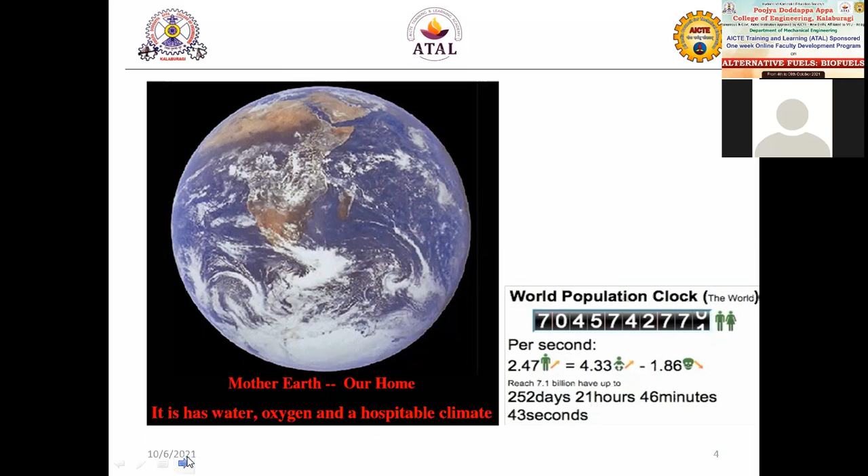So this is how we have our biosphere. We have large species consisting of plants, insects, unicellular organisms. We have advanced animals, mammals; all these diverse groups of organisms form this beautiful earth. And this particular point is to be noted by the human race, that earth is not the gift only for the human race, but we also have to support other forms of life. So we cannot just destroy the other forms of life to make ourselves comfortable. That would be going against nature, because whatever form of life we have has been created with a reason. So therefore, living in harmony with the different forms of life we have on earth is the basic principle of sustainability.

So with this particular backdrop of sustainability, I'd like to introduce the basic concept of Dashavatara, what we have been knowing since our childhood. So this basically depicts the various forms of life and how we respect the different forms of life by giving them the role of deities. We have the Matsya Avatara, we have the Kurma Avatara, we have the Avatara in form of the boar, we have Narsimha Avatara and different avatars that we study in our mythology. This basically highlights how we are in harmony with nature.

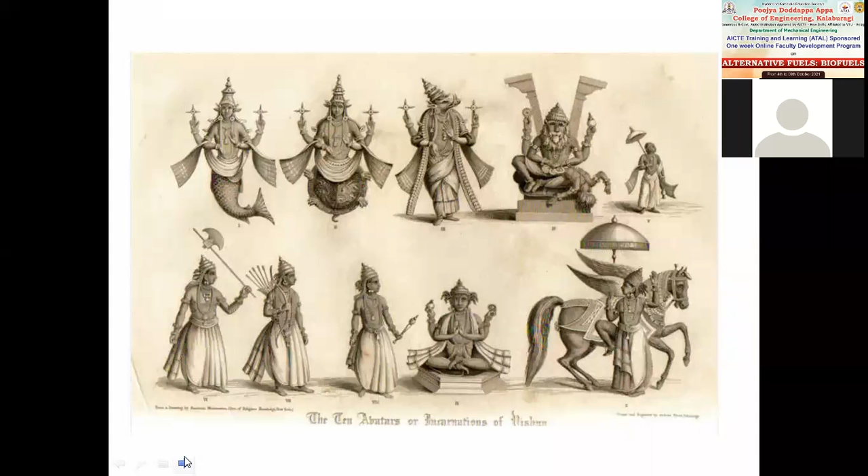And with this particular concept, I extend further: why do we require or how do we attain development? Energy is an important part of development. So as we can see, we require energy in different forms and we need it for our requirements. We need it for vehicles. We need it for running the industries. We need it for our recreation. So life without energy cannot be imagined. Therefore, energy has been an integral part of our day-to-day life. So now, the quest for energy has made human beings explore different resources.

For example, we try to generate electricity from nuclear fuels. We also generate electricity from coal. We also generate electricity from wind. So this way, ever since the inception of the human race on this earth, we have found that man has been exploring different ways to produce energy for his basic requirements. So that is how we see energy and development are interlocked, or they are closely connected.

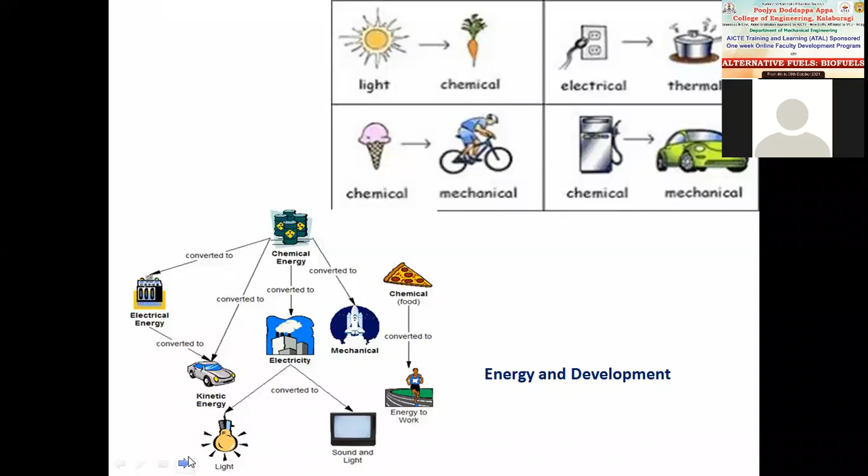And further, as I just highlight here from this particular slide, we use different forms of energies, and scientific development has been made in different areas to explore or to harness that form of a resource to generate electricity. So we study nuclear physics, where it was understood that by means of splitting the nuclei, we can have a large amount of energy generated. So that gave rise to what we call the nuclear fission reaction, nuclear fusion reaction.

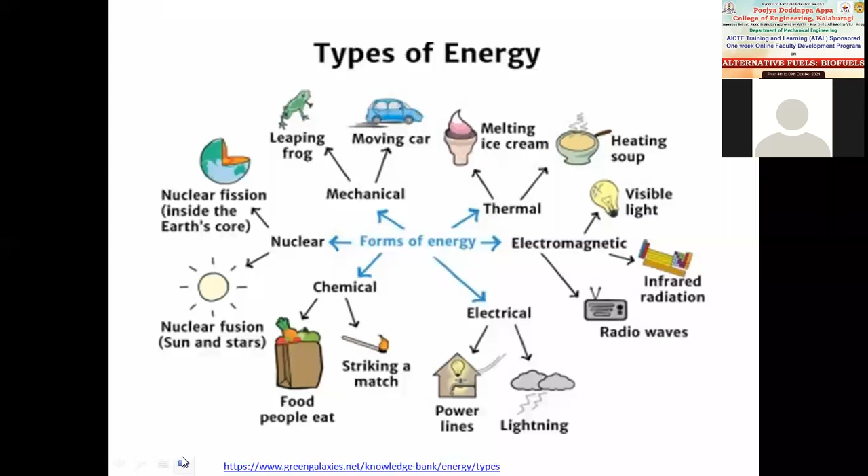So this way, man has always been curious to understand the intricacies of nature and then try to use these resources for his existence or for his benefit. So that is how this particular slide explains the different forms of energies and how they can be explored to meet our energy needs. And as we see here, nature has bestowed upon us various forms of energies. The energy in lightning is of such a large magnitude, but it happens in such a small instant of time that man has not been able to tap this form of energy.

Similarly, scientific advancements have made it possible for us to generate electricity and then use it for illumination purposes. And similarly, the other part of the slide shows you the heat energy that we use for cooking applications. And we have also explored the different elements that constitute the periodic table, and we are trying to explore how each element can benefit our requirements.

And this is how I group the energy sources into two main categories: the resources which are connected with nature and which do not require a long time to get re-established or replenished. This is what we call the renewable sources of energy, and then we have the non-renewable forms of energies, which are again derived from nature. But these natural resources are of such a form that nature does not have a cycle which quickly replaces them. So non-renewable energy sources are the other segment.

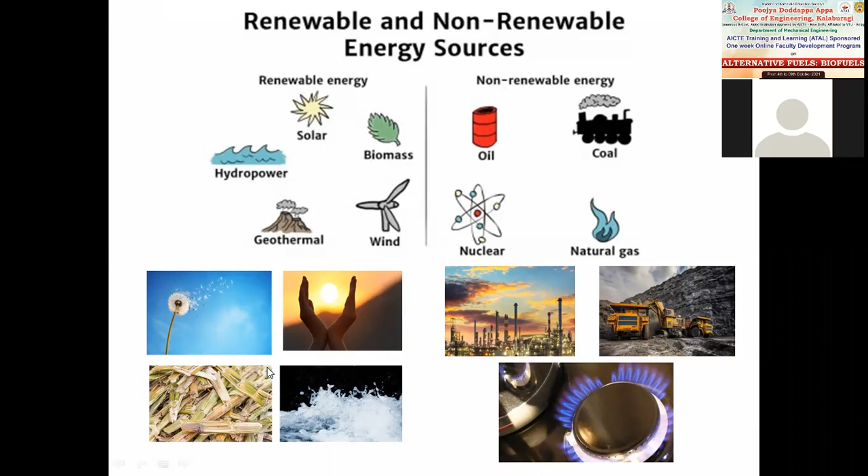So moving ahead, you can observe the various forms of renewable energy sources highlighted in this particular slide. And as you can see here, with a large population, close to 7 billion, we cannot totally stop developmental activities. Industries are required, and industries in their current stage are putting a lot of pollutants into the environment, thereby bringing about undesired changes in the environment, which are totally going to change the face of the earth.

So therefore, we have other options. We can explore renewable forms of energy like wind or solar energy, which can be a very good substitute for oil reserves or other fossil fuels.

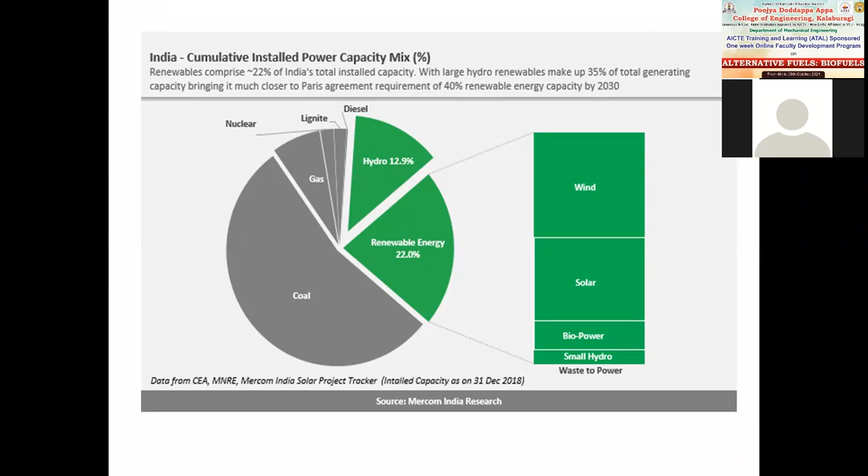So that is how we have got a quick representation of the primary energy demand and the electricity generated by our country. So as you can observe, this is the data, slightly old, 2018-19 data. Again, we find the major part of it contributed by thermal, a small part of it by nuclear energy, and that is how we can also observe the data of how there is a shift from the fossil fuels towards renewable energy sources. As you can find from this particular graphic, renewable energy constitutes 22%, and hydro contributes around 12.9% of the total energy that is produced.

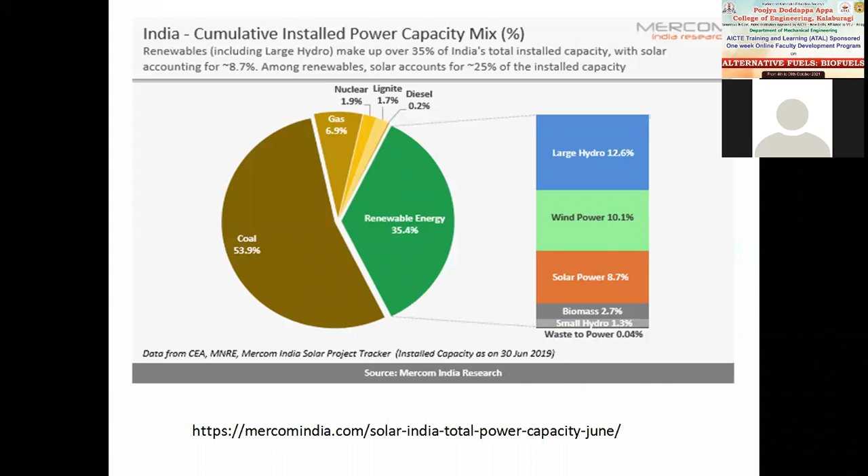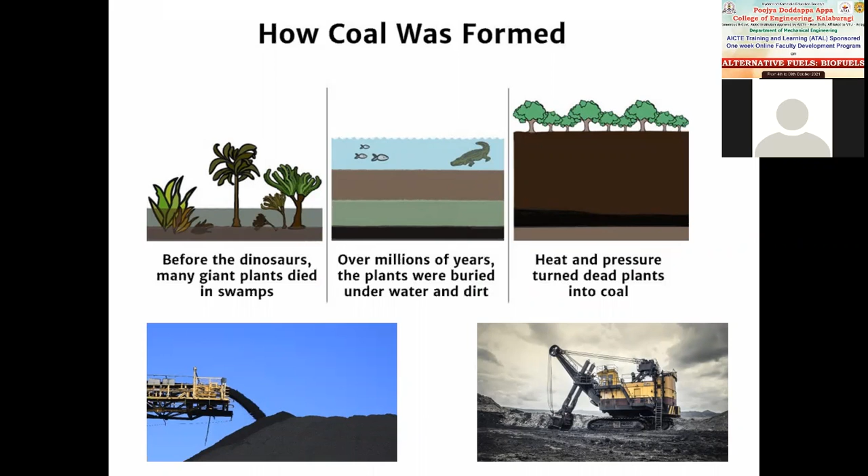And here again, we have got the data pertaining to the cumulative installed capacity of the generation. And this is a basic slide which shows how coal is formed. And as I just mentioned, coal is a non-renewable form of energy because it takes a long time for nature to replace it. However, coal is available in large quantity. That is the reason the human race has been exploiting this particular resource for its energy needs. And that is how we observe the formation of coal.

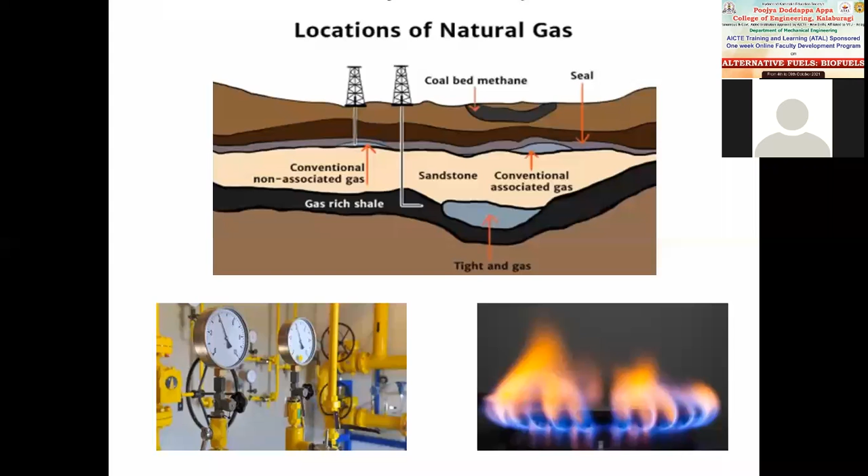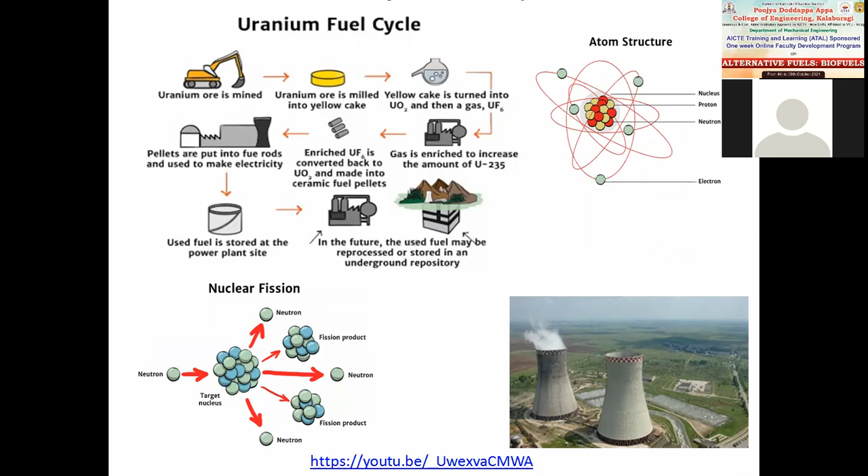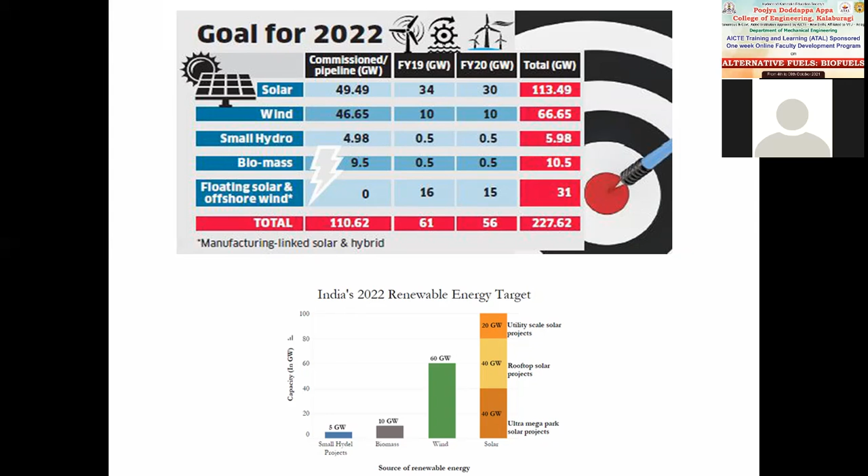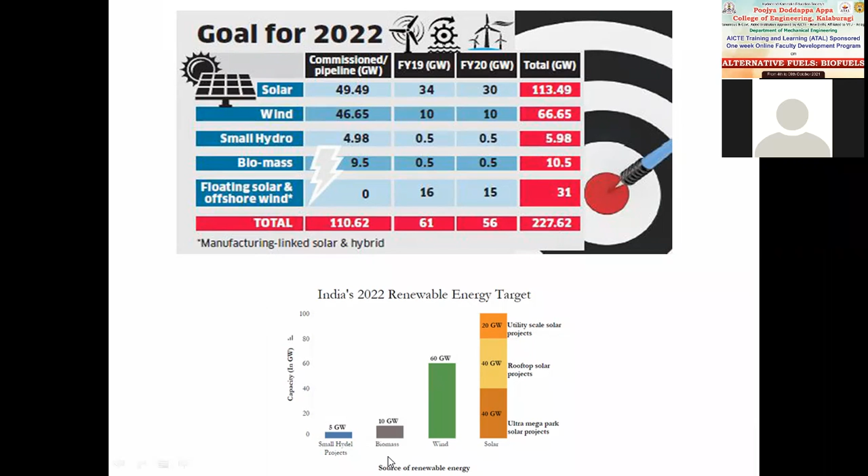And please note that the Government of India has an ambitious plan of switching over to renewable energy sources, as we can observe from the various programs supported and implemented by the Government of India. And we have been seeing a lot of very good initiatives taken by the government in this direction. It's not only our country; the entire world is now moving towards using nature-based energy sources. So that is how we find the adoption of renewable energy systems for our day-to-day needs.

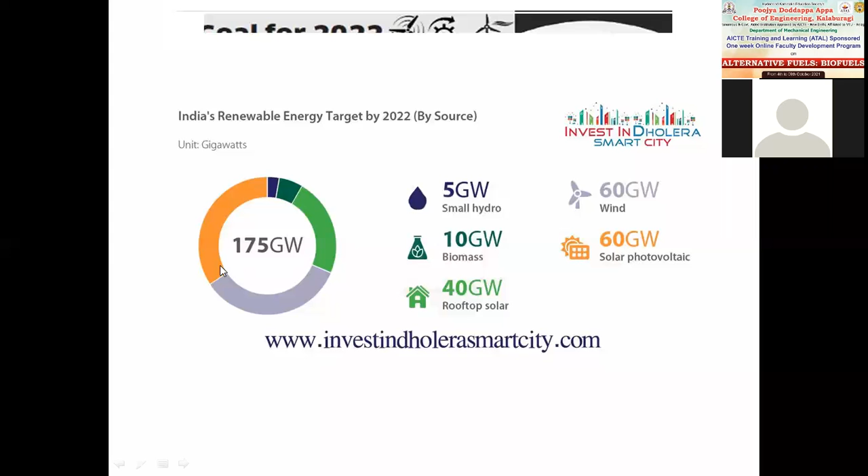And this is how we can see India's renewable energy target by 2022. There is an ambitious target of having 175 gigawatt of energy coming from renewables, and a major part of it is contributed by solar energy, and these are the different options we have for the energy mix. So now we can also see the power breakup.

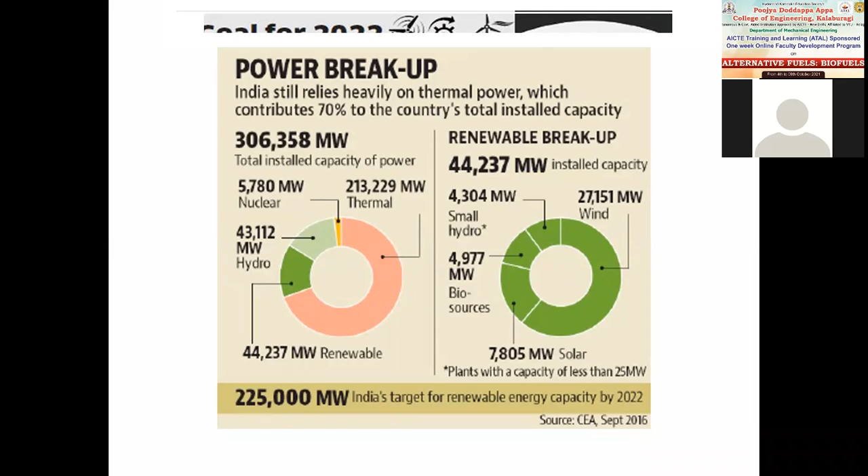India still relies heavily on thermal power, but it has gradually been shifting towards renewable energy sources. But still, thermal energy has been a major contributor to the energy mix, and we are targeting 225 gigawatt of renewable energy capacity by the year 2022. And this is how the solar energy systems contribute.

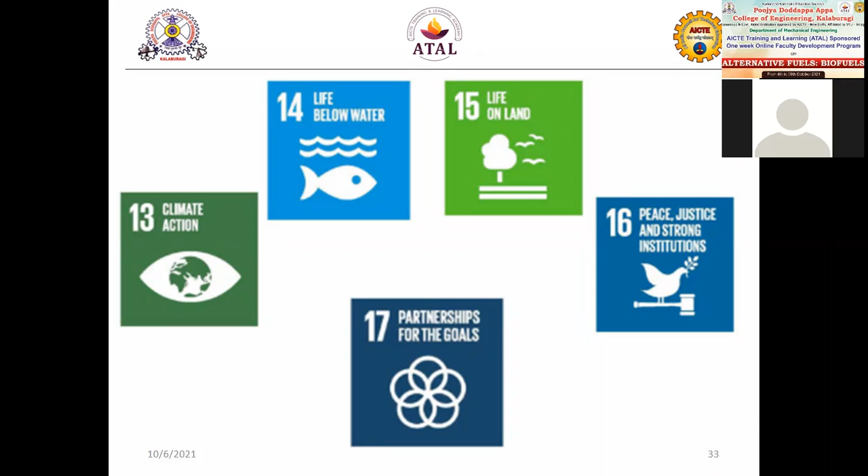So that is how the sustainable development goals also cover what action we take so that climate change and other things detrimental to the existence of life on Earth do not put life under threat. It is an initiative supported by all major countries of the world to make our Mother Earth a safe place for future generations. So that's about the sustainable development goals.

Now coming to the next point of my discussion, sustainability is about judiciously using our resources in a way that does not harm the environment. In this direction, we have biodiesel, which is the central theme of this presentation. We have been seeing the different requirements for why we use fossil fuels, which include petrol and diesel, and how biodiesel is different from the petrol and diesel we are using.

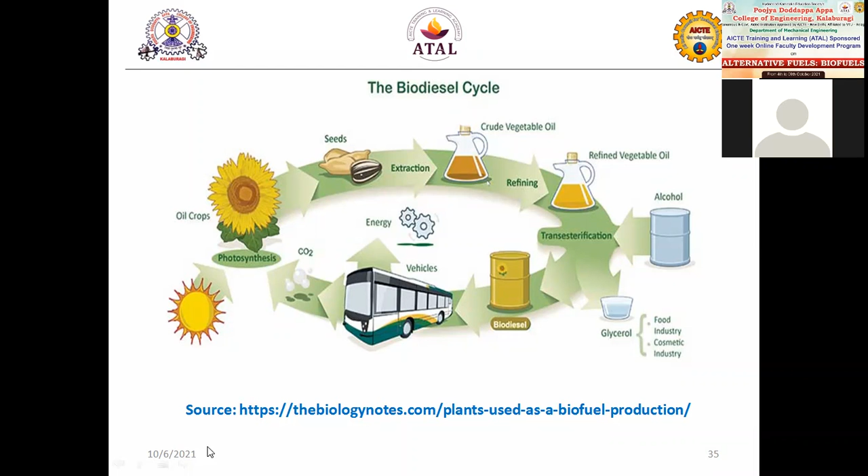So now, that is what we have here. How is our national policy on biofuels? Biofuels is a broader group of derivatives obtained from bio sources, and biodiesel is one fuel under the broader umbrella of biofuels. An indicative target of 20% blending of ethanol in petrol and 5% blending of biodiesel in diesel is proposed by 2030. This means the Government of India is trying to promote the use of biodiesel. Please observe, we cannot use 100% biodiesel for our transport needs.

They have to be used in blended forms. When it comes to ethanol, it can go up to 20% blending, and biodiesel is targeted at 5%. The policy also states that with the thrust on advanced biofuels, it indicates a viability gap funding scheme for 2G ethanol biorefineries of 5,000 crore over 6 years, and additional tax incentives, higher purchase price compared to 1G first generation biofuels. So they are bringing about changes in how we can make larger use of biofuels as a replacement for fossil fuels.

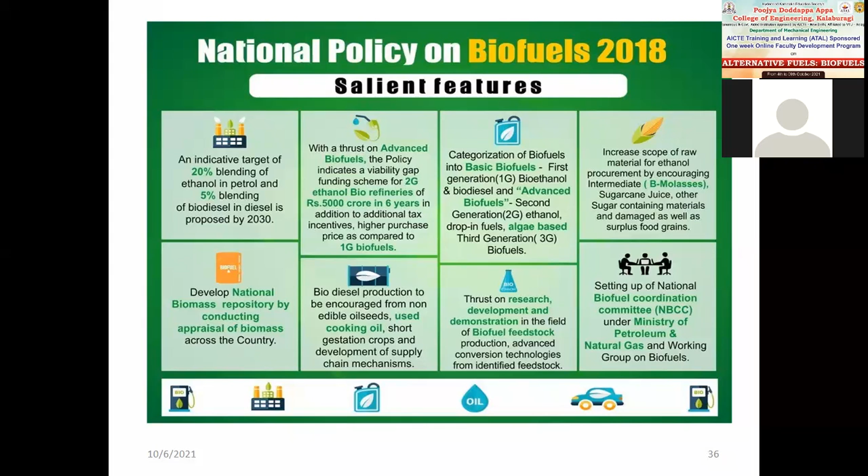Similarly, we have the major biofuel contributors as ethanol and biodiesel. The consumption impact: biofuels are renewable sources, they reduce CO2 emission, improve air quality, and decrease pollution. These are the points we can easily understand when we look into how biodiesel can benefit us.

And the production impacts: competition for land, water, and resources. If we have a biodiesel or biofuel strategy where, apart from growing food grains, we also use part of our land to grow oil seeds for biofuels, then there would be competition for land, water, and other resources. There are also land use changes, loss of soil organic carbon, impaired soil productivity, greenhouse emissions, and environmental pollution. These are all the practical implications to be considered when devising a particular policy.

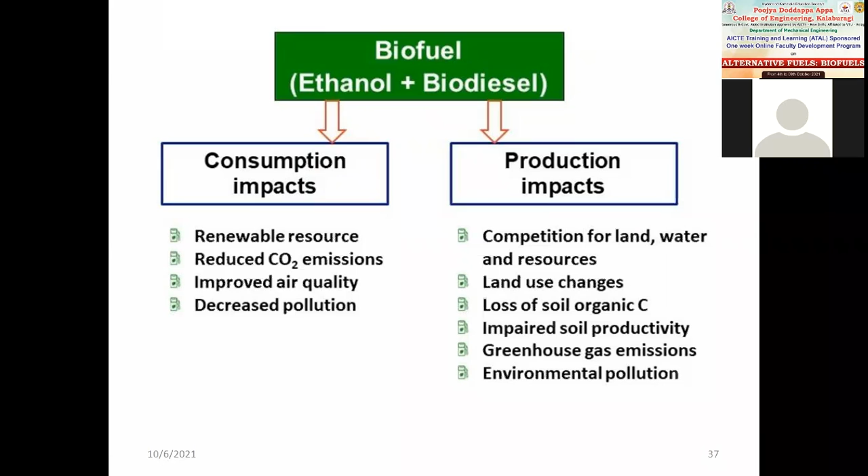Yeah, this is about how we make biodiesels as a sustainable source. This part of my discussion has covered what is sustainability and a small insight into what biodiesel is, and how biodiesel qualifies to be called a sustainable fuel for power generation.

So now I am going to present a research case study where we have two segments in this part of the discussion. The first part highlights the production or generation of vegetable oils. This particular research, carried out in our university, was for a batch size of biodiesel production in a lab scale.

So I will quickly highlight some desirable properties of the vegetable oils and how these properties are essential to qualify as a fuel substitute for diesel when used for operating an engine. So this is how I quickly move on to highlight some important properties of diesel and vegetable oil.

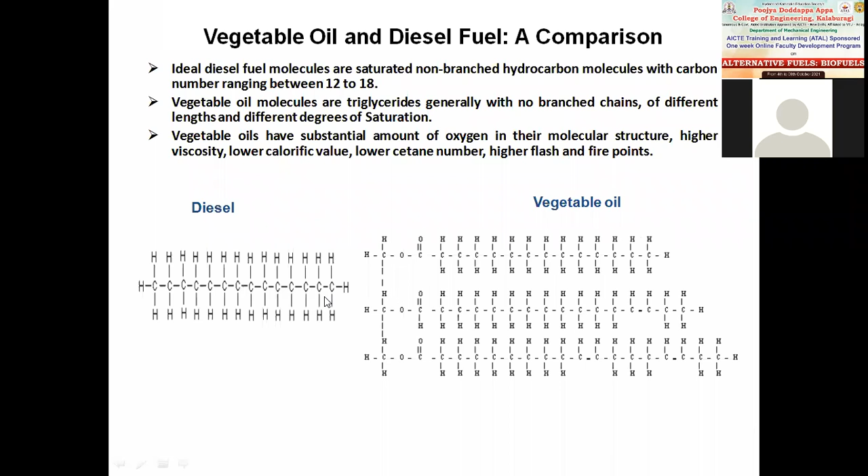They also have higher viscosity because of their chemical structure. The viscosity of vegetable oils - we'll see the values in later slides. So that's how we have these two different chemical structures which explain the diesel fuel and the vegetable fuel. And a quick overview of the vegetable oils.

They present a very promising alternative to diesel oil since they are renewable and have similar properties. Because we have large areas where we can grow the renewable fuel, they are stated as a promising alternative, offering almost the same power output and a slightly lower thermal efficiency when used in a diesel engine. Reduction in engine emission is a major research aspect for vegetable oils.

Alternative liquid fuels must be technically and environmentally acceptable and economically competitive. There's an important point here about the use of vegetable oils - if they again pose environmental issues, then there would not be a good replacement or alternative for diesel fuel. Therefore, a thorough property investigation has to be made before we invest in a particular type of vegetable oil.

Vegetable oils compared to diesel fuels have acceptable heating value when subjected to the process of transesterification, where we tune them to values close to diesel, giving acceptable heating value. But heating value is always less than what we have for diesel fuels. Vegetable oils are triglycerides, which are esters of long fatty acids and the polyalcohol glycerol, having large molecules with carbon, hydrogen, and oxygen - this oxygen is an additional part not found in diesel fuel.

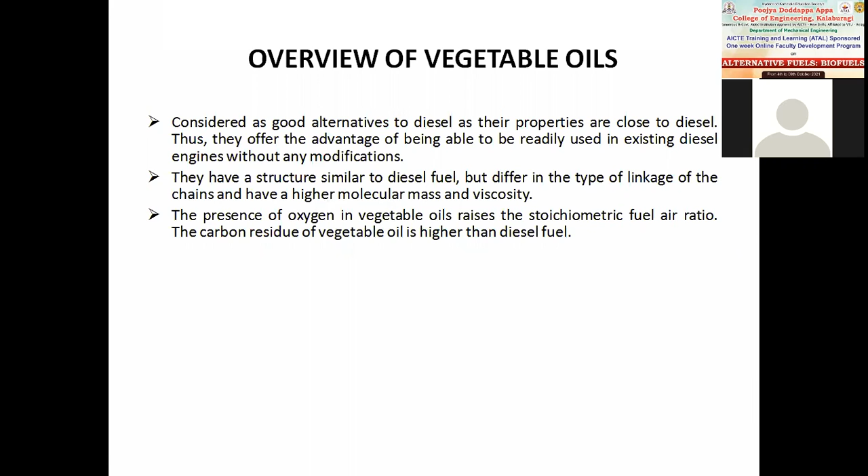A number of vegetable oils have been tested all over the world to evaluate the performance in diesel engines. As you can observe, we focus on using the vegetable oils which are not directly used as food items: neem oil, palm oil, honge oil, rapeseed oil, coconut oil, cotton seed oil, jatropha oil, mahua oil, rubber seed oil. These are some of the options, but again, all of these options may not be suitable for large production of

Studies have revealed that some of these oils can directly substitute diesel in electricity generating sets and irrigation pump sets with no modifications required. Such oils are commonly referred to as straight vegetable oils. Vegetable oils that do not require major processing before being used as fuel are called straight vegetable oils.

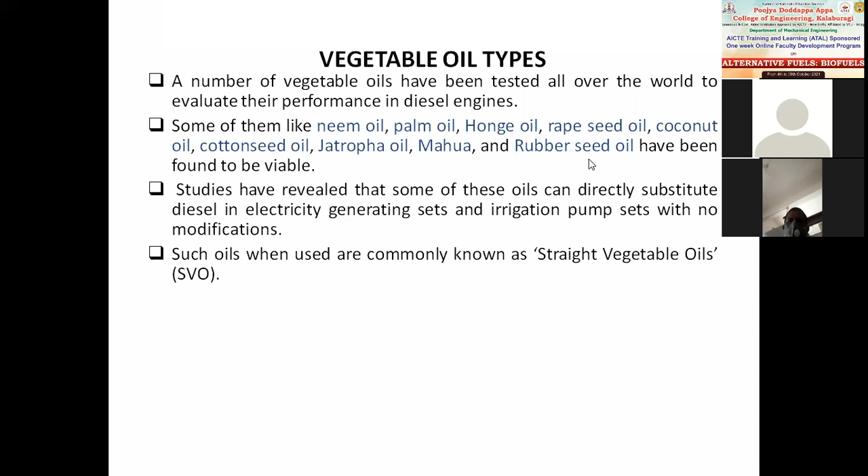Some of the properties, we will just quickly make a comparison. The important properties include density, calorific value, cetane number, viscosity, flash point, carbon residue. We have this particular representation where diesel is the benchmark, and we're going to compare with honge oil, jatropha oil, rapeseed oil, and the other versions. I'll just quickly highlight the calorific value.

Diesel has a calorific value around 42 megajoules, whereas the various other vegetable oils are much lower than the value we have with diesel. Similarly, the cetane number. Viscosity is one major concern we find with the vegetable oils, and as you can observe, viscosity is much higher. That's why we subject it to the process of transesterification to bring it to a lower value. So these are some important properties of the non-edible vegetable oils.

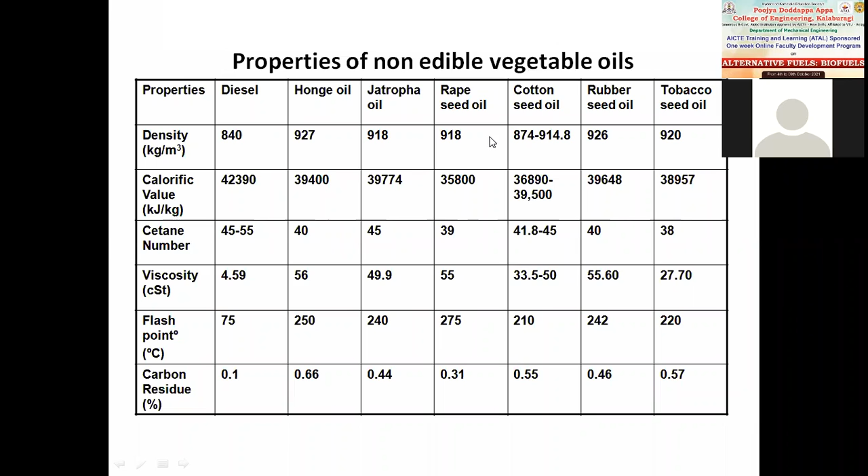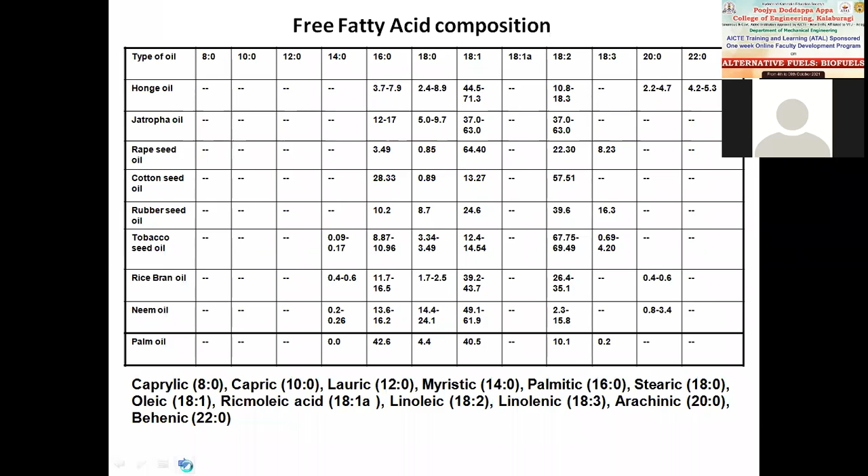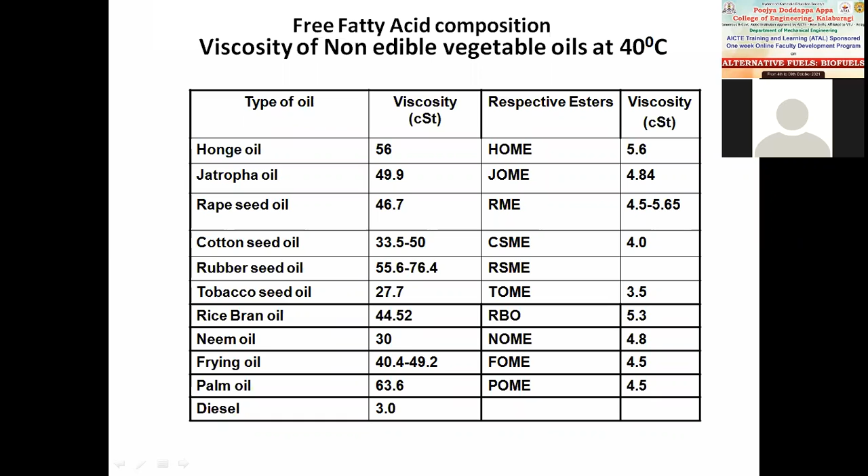These are all the vegetable oils after subjecting them to the transesterification process. So we would call these vegetable oils, whereas these are called biodiesels, the biodiesels of the different vegetable oils we obtain. And please note that the viscosities of the different grades of vegetable oils are no doubt higher than diesel, but they can be suitable for operation on a diesel engine when used in a blend.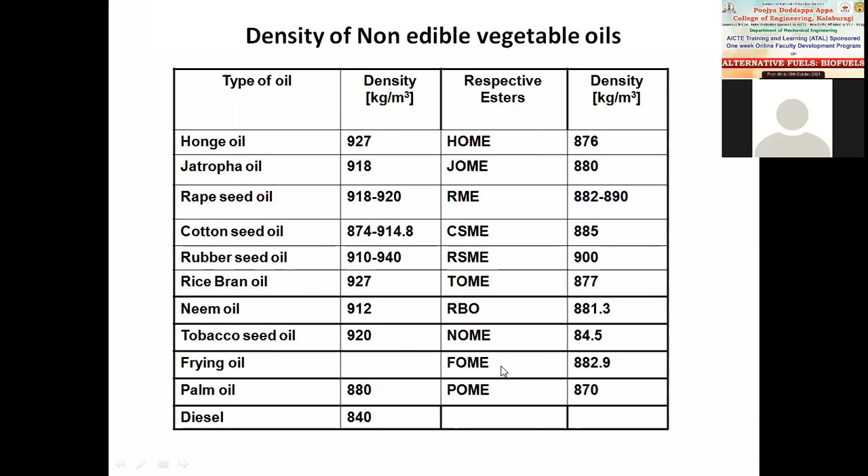And similarly, the density of the different vegetable oils along with the biodiesels we obtain from them, and similarly the calorific value. This is where we highlight that honge oil has a calorific value of 35,800 kilojoules per kg; after the transesterification process, biodiesel from honge oil gives us a calorific value of 36,120. Of course, lower than what we have for diesel, which has 43,000 kilojoules per kg.

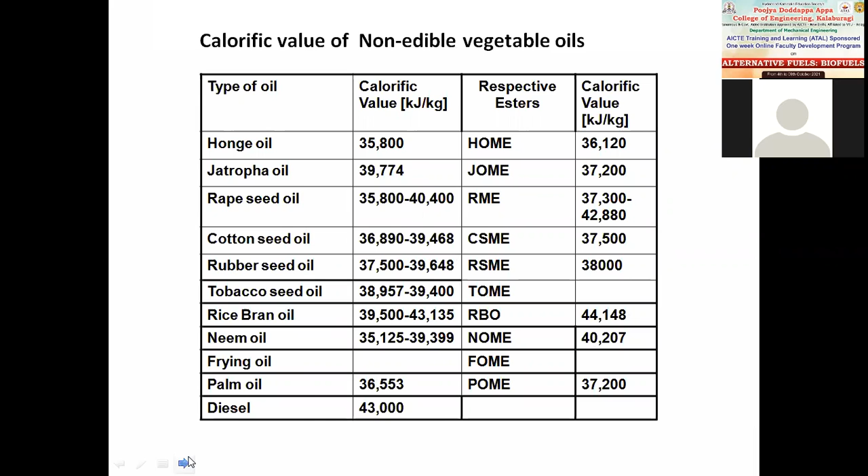And as you can see, the different grades of vegetable oils vary in terms of their calorific values, and the resulting calorific values after the transesterification process are also of varying nature. So these values will be indicators of their feasibility as a substitute for diesel fuel.

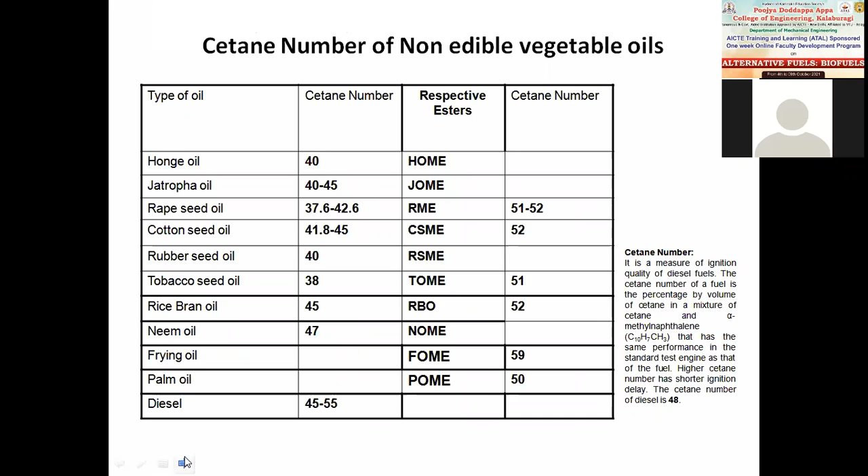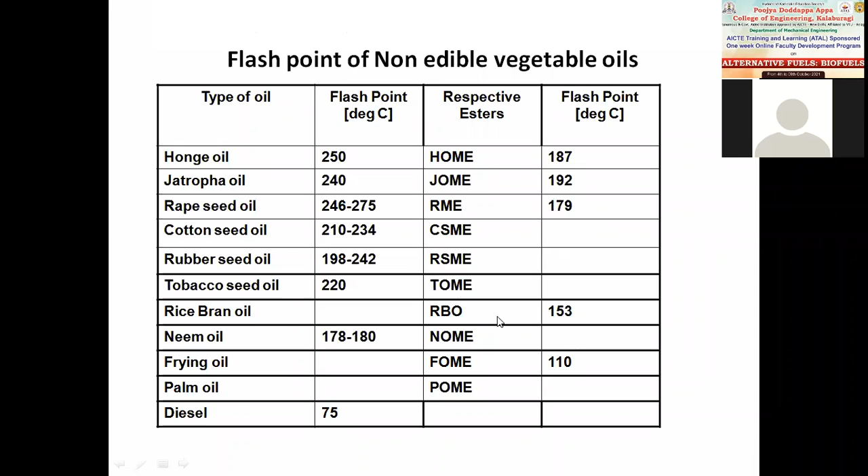Now the challenges we have with using vegetable oils: operational and durability problems associated with using vegetable oils, and how we can address these issues. When I say vegetable oils, they are the raw or crude vegetable oils before being subjected to the transesterification process. So operational problems are the starting ability, ignition issues, combustion parameters, performance parameters.

Experiments were conducted with crude vegetable oil as well as the vegetable oils when they were transformed to biodiesels. Deposition formation, carbonization of the injector tip, which would lead to blocking of the injector hole, piston ring sticking, lube oil dilution, fuel filter plugging. All these are the major issues we observed using the vegetable oils.

These vegetable oils were subjected to the transesterification process, and these problems were handled by means of heating, blending, or transesterification. High viscosity, extremely low volatility, polyunsaturated characteristics were addressed by these respective interventions. So vegetable oils require transesterification for their conversion to biodiesel. That's the basic process, where we transform the high viscosity vegetable oils into biodiesels as renewable, non-toxic, containing oxygen, no sulfur, etc.

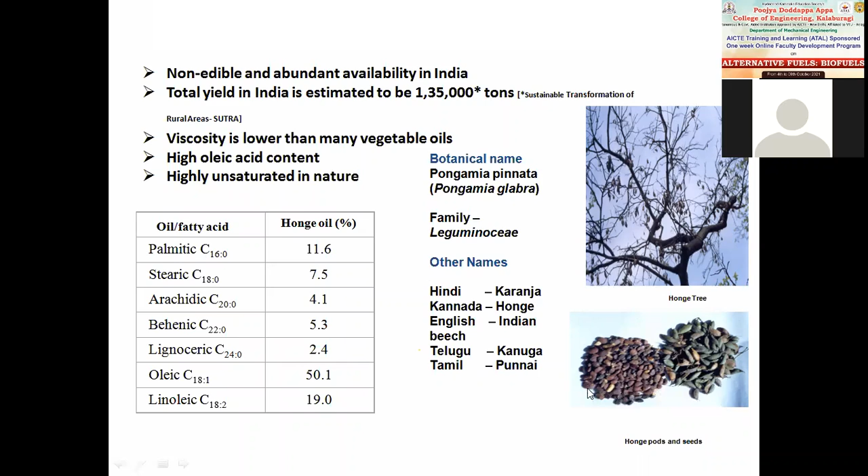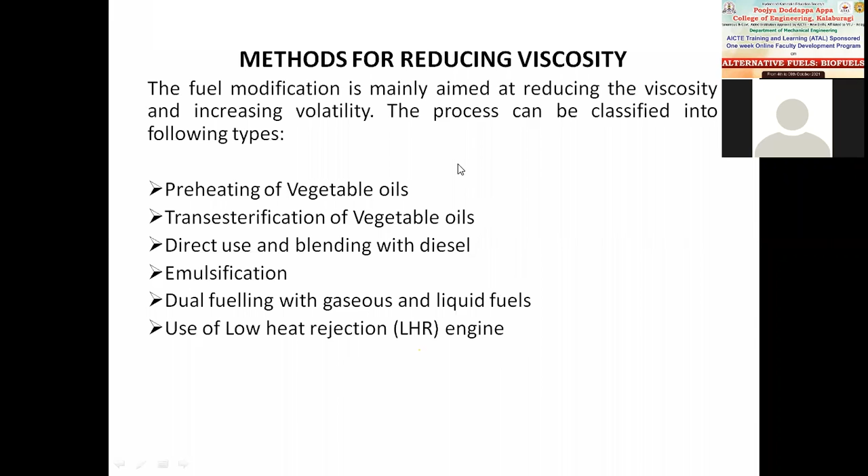This is one of the biodiesels investigated in our lab, which is honge, also referred to as Pongamia pinnata. This is the tree, and these are the seeds we extract from the pods of the plant. These are the methods of reducing viscosity: preheating of vegetable oils, transesterification, direct use and blending with diesel, emulsification, and use of low heat rejection engine. These were all the experimental observations that were made.

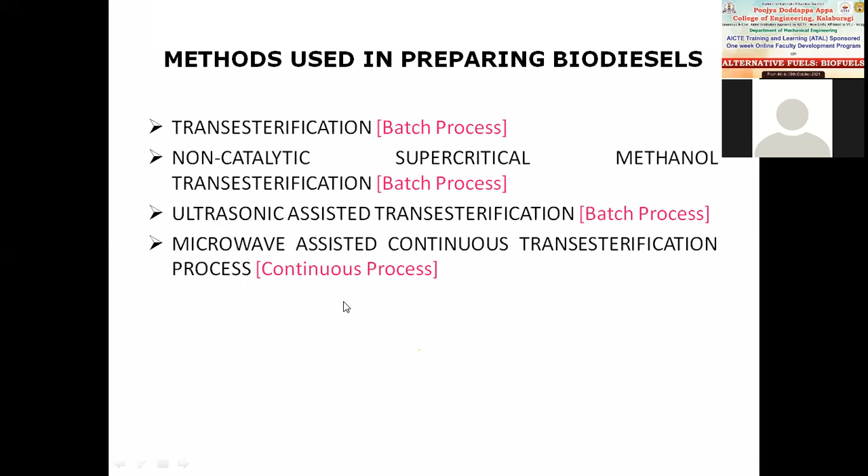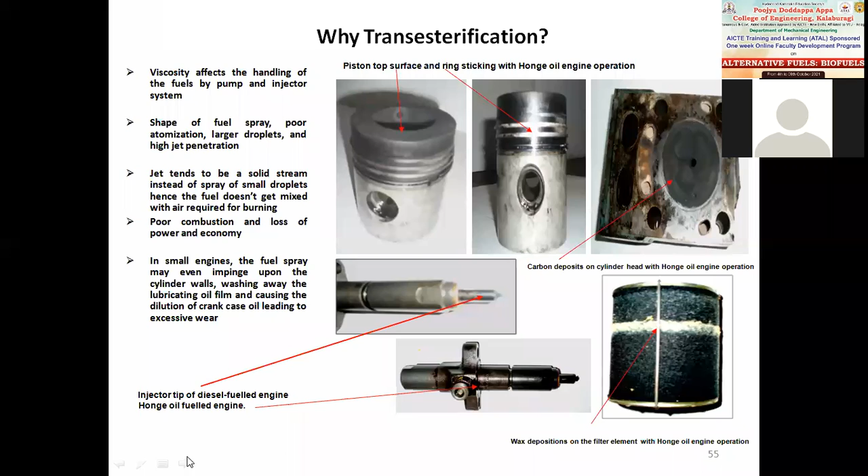Practical results show that direct use of vegetable oils can lead to carbon deposition, wax deposition, and the injector tip getting clogged, so that's how we have carbon deposition happening in the injector of the diesel engine. And the chemistry of transesterification: the triglycerides, in the presence of a catalyst with methanol added, result in methyl esters. Methyl esters are the biodiesels, and the byproduct we obtain is glycerol.

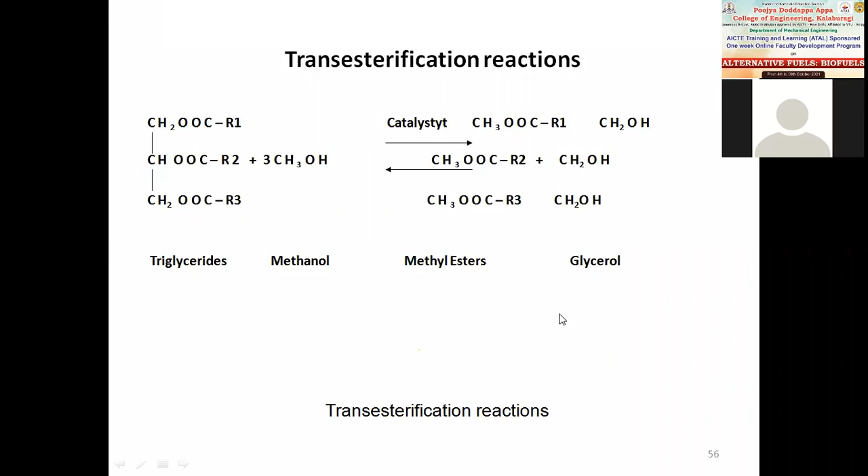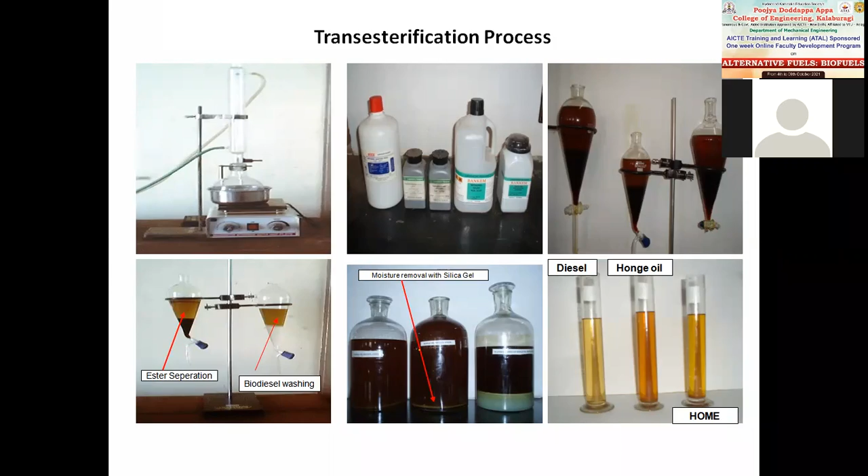from the glycerol. Then it's subjected to ester separation and biodiesel washing, and moisture removal is also an important part where we separate out the leftover moisture from the biodiesel, and this is how we have all three phases of the fuel processing. We can see the diesel, this is raw Pongamia oil, and this is the biodiesel we obtain from it. So this part highlights the production of biodiesel on a batch scale, and these were the different parameters taken into account during biodiesel production.

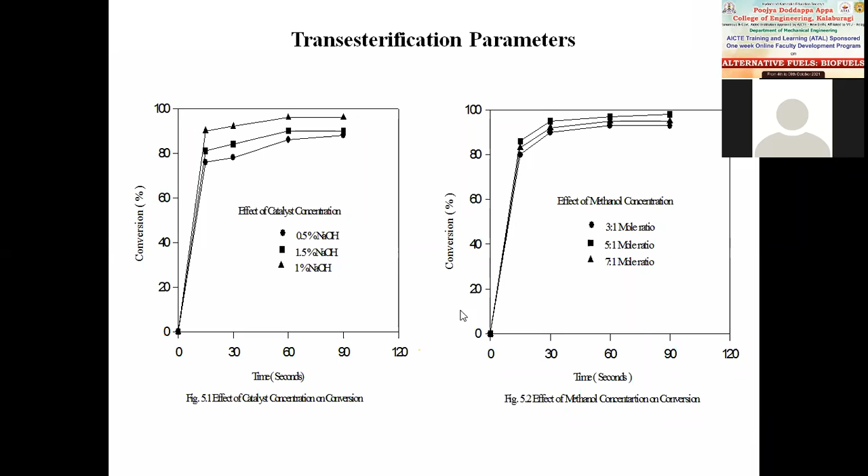Again, the temperature observation of how the viscosity of the three constituents compares: diesel, raw Pongamia oil, and in between the properties of raw Pongamia oil and diesel, we have the viscosity of the biodiesel, which due to the transesterification process comes closer. It has properties very close to that of diesel fuel.

And similarly, here you can observe viscosity of the blended fuels, how it compares with diesel. So here you can observe B100 refers to 100% biodiesel, and B20 is 20% of biodiesel and 80% of the diesel. So that's how 40% and 80% the viscosity of the blends is being compared here as a function of temperature.

And here again, the different properties of the blends. So the question arises, why should we know the properties of the blends? Because we are using the biodiesel in a blended form. So that's the reason we investigated the properties of the blended fuel in different proportions.

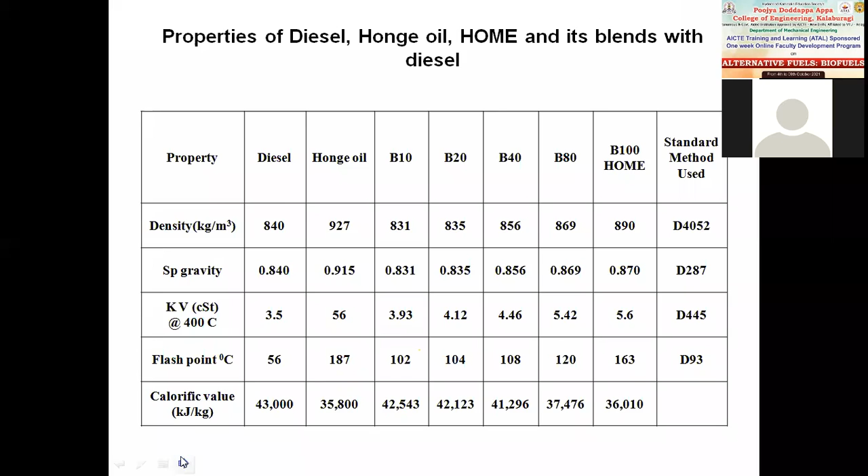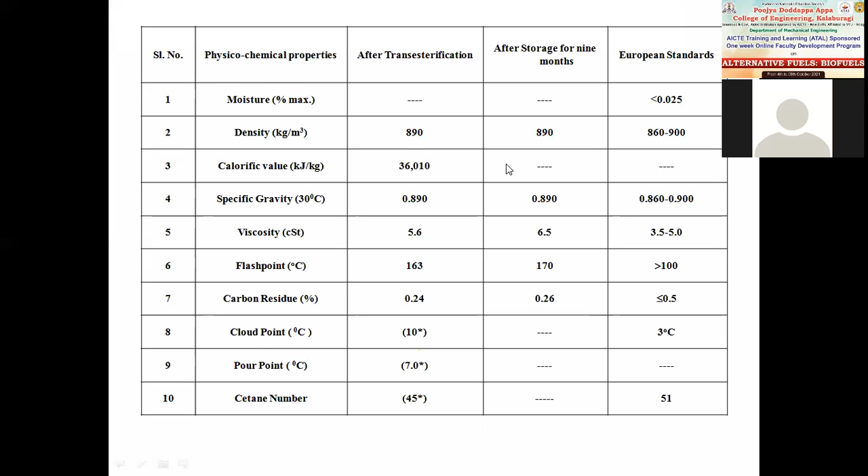And here we can just draw the conclusions from research case 1, which highlights trans-esterification of the Honge oil. The quantity of catalyst and methyl alcohol used is crucial for successful reaction. Washing is necessary to drain away undesirable contaminants in the biodiesel.

And we have 1% NaOH, which is a catalyst, and 5:1 molar ratio of methyl alcohol, 60 minutes of the process time, and 65 degrees centigrade as the operating temperature during the trans-esterification process to be the optimum value. Non-catalytic supercritical methanol trans-esterification being a batch process results in faster biodiesel yield and uses no catalyst. So this is another way of trans-esterification.

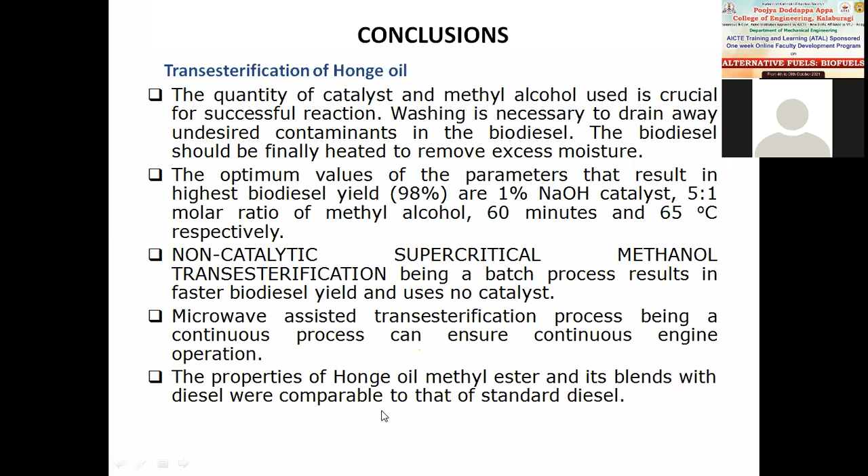Microwave assisted trans-esterification being a continuous process can ensure continuous engine operation. So properties of Honge oil methyl esters and its blends with diesel were comparable to that of standard diesel. These are some of the observations that were made as part of the study. So that brings me to the end of the first case research, which highlighted the production of biodiesel and its physicochemical properties as compared to diesel.

And the second research case study highlights what will be the consequence of using the produced biodiesel in engine as a fuel. The main objectives of the study: to study feasibility of Honge oil methyl esters for CI engine in single fuel mode and to optimize the injection time. Because the engine that is supplied by the manufacturer is tuned to operate on diesel fuel. So now what will be the implication of using different blends of biodiesel instead of the standard rated diesel fuel?

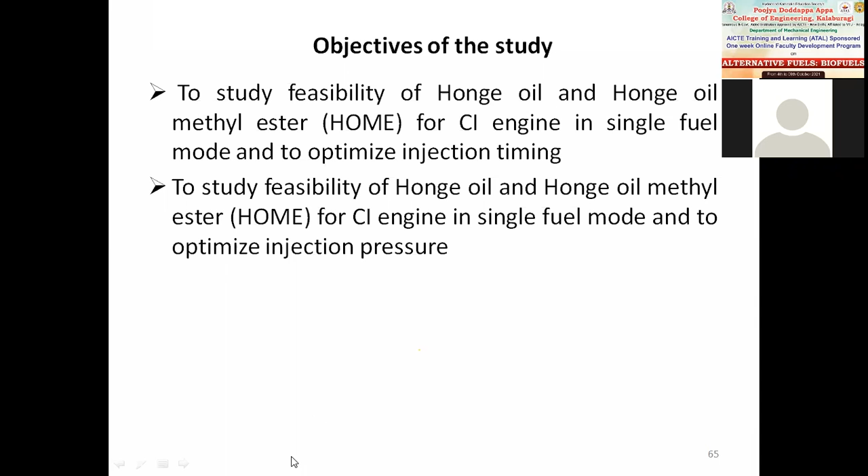So we have made investigations, and these investigations are presented in the form of feasibility studies with respect to optimizing injection timing and optimizing injection pressure. Injection timing and injection pressure are the critical parameters which have an influence on the overall brake thermal efficiency and the other parameters related to the engine. Let me quickly move on to the parameters that were investigated as part of this study.

The brake thermal efficiency and the volumetric efficiency were investigated. Emission parameters included the exhaust gas temperature, the smoke emission, hydrocarbons, NOx, and the CO emissions. The combustion parameters included peak pressure and maximum rate of pressure rise, ignition delay, combustion duration, heat release rate. All these parameters were investigated.

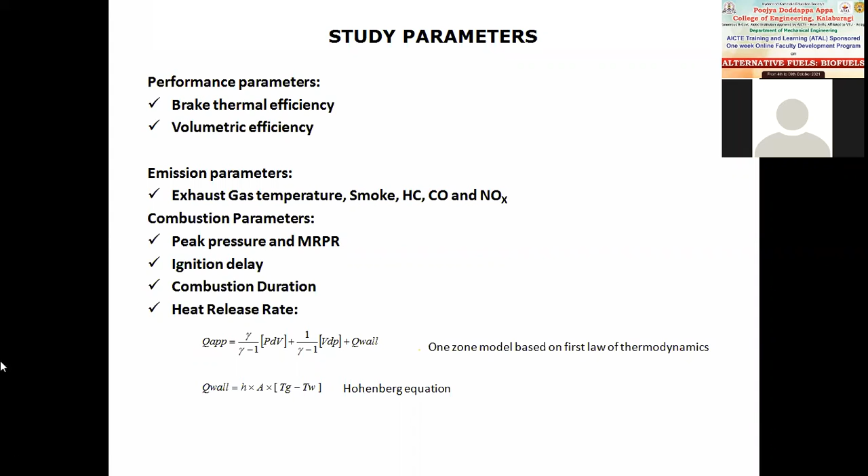So why are these parameters important? These parameters are important for verifying if a particular grade of biodiesel would operate well when it is blended with the diesel fuel. So these investigations will help ensure the usage of the biodiesel as a fuel. So these are the specifications we have for the diesel engine. A single cylinder diesel engine, Kirloskar make, was used for our studies.

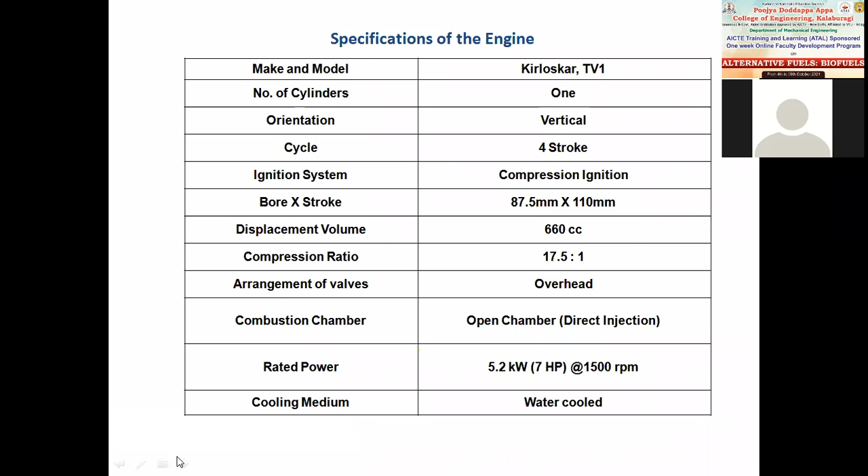This is the engine setup present in the IC engine lab. As you can see, the engine setup has provision for acquiring the data related to the operation of the engine. Here, the Hartridge smoke meter, 5-gas analyzer, and this is the arrangement we have in order to make changes in the injection pressure and the other parameters.

So we have got a computerized IC engine test rig with various facilities to measure the different parameters that are required to perform the engine testing, and we'll be running the engine at different percentages of the maximum rated capacity of the engine. So part load as well as full load operation of the engine were investigated as part of the study that was conducted.

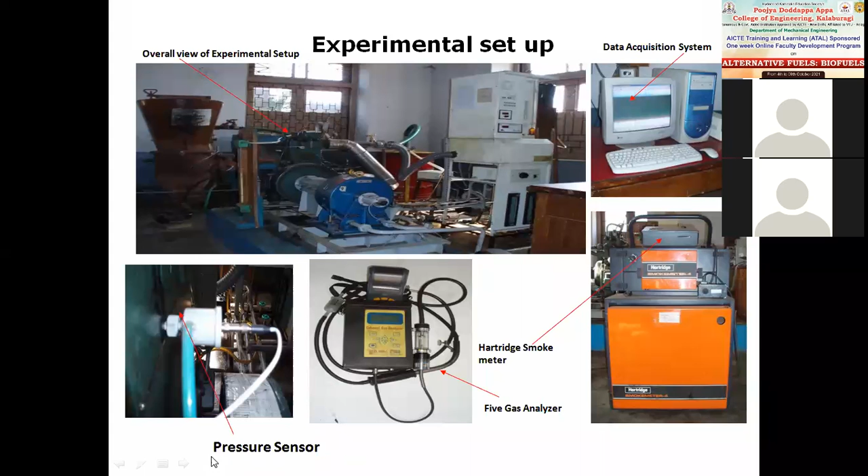Effect of injection timing was investigated taking different combinations, 19°, 23°, 27° before TDC, and injection pressure was varied between the limits 205 bar to 280 bar. For each load, airflow rate, fuel flow rate, exhaust gas temperatures, various parameters were

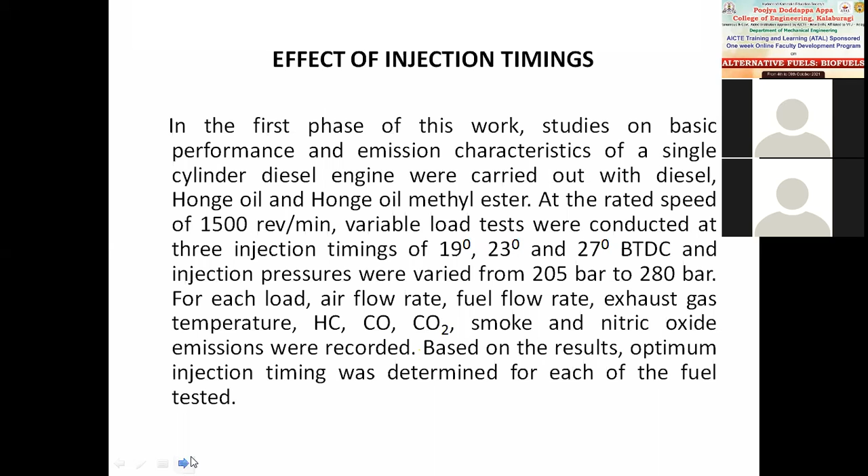experimentally observed. Injection timing refers to the angle; the engine is tuned or manufactured for a particular injection timing. When we use the blends of biodiesel, there is a requirement of some modifications that have to be incorporated so that the engine again operates at a higher thermal efficiency.

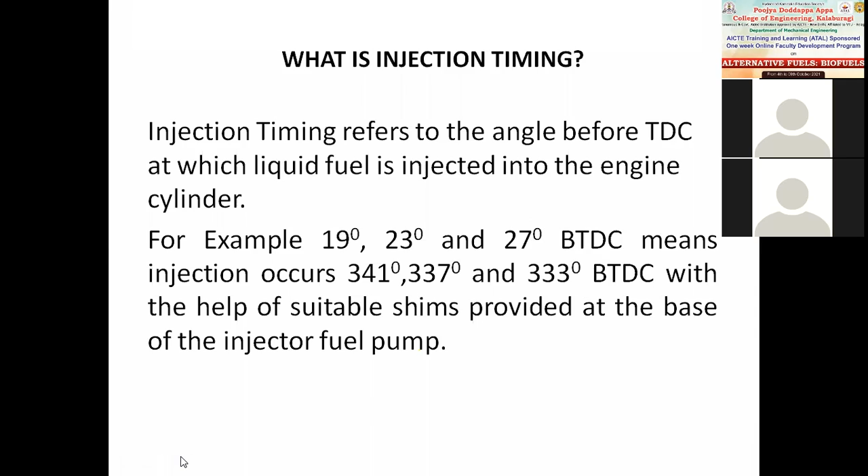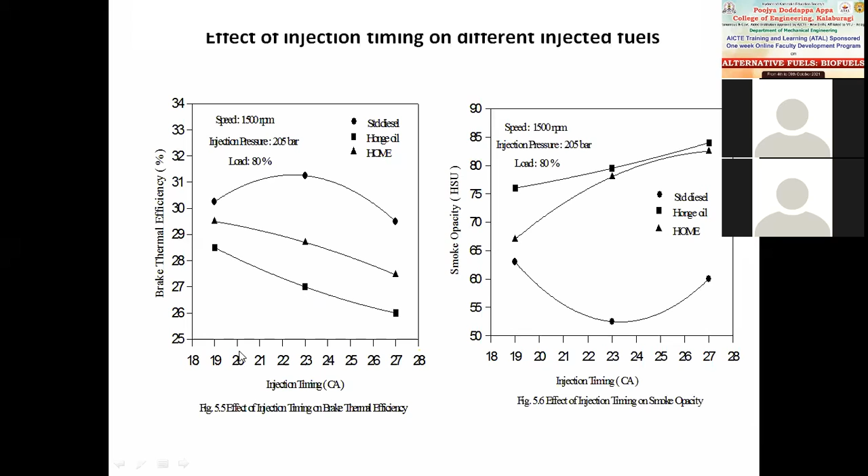So now please observe here 19°, 23°, and 27° BTDC means injection occurs at these angular positions, and we could do that by means of using shims provided at the base of the fuel injector. And what will be the change we observe in the performance and the emission characteristics of the engine when we do these tests?

The brake thermal efficiency for various injection timings, 3 different injection timings were taken into account. So for 205 bar injection pressure, 80% load, you could see the influence of the injection timing on the brake thermal efficiency of the engine. Similarly, the smoke emissions recorded for similar operating injection pressure for standard diesel, Honge oil. This is the raw Honge oil, and the biodiesel of the Honge oil, what we refer as the Honge oil

methyl ester. So this is how we could observe that the Honge oil gives the higher smoke emissions as compared to the other two combinations. We could see that the smoke opacity is lowest for the standard diesel, whereas the raw Honge oil and the biodiesel of Honge oil produce slightly higher smoke compared to the standard diesel.

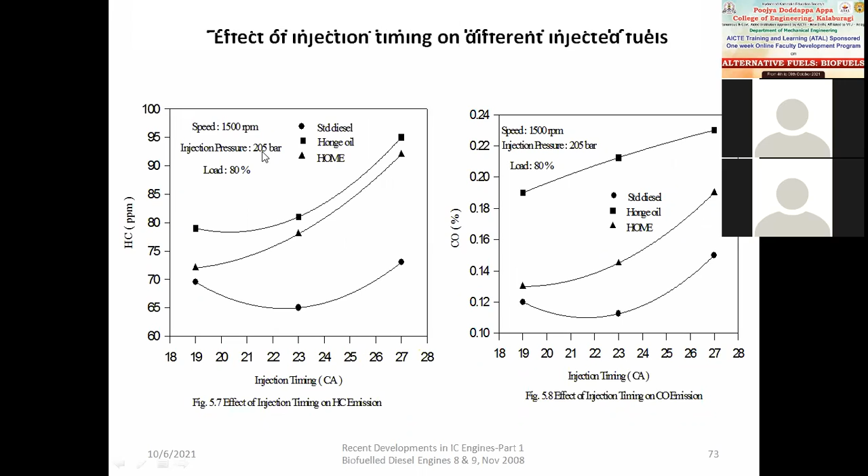Similarly, hydrocarbon and carbon monoxide emissions for 80% load with 205 bar of injection pressure with a constant speed of 1500 rpm maintained for the engine. We again find that the raw Honge oil has higher hydrocarbon emissions compared to what we obtain from the biodiesel of the Honge oil, or HOME, and similarly diesel has a lower emission relatively compared to the biodiesel.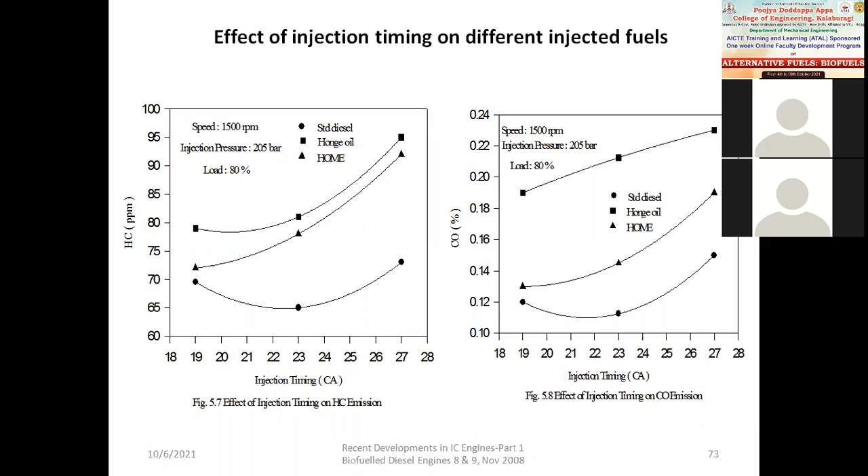And similarly, the carbon monoxide in terms of percentage for the same fuel combination tested was observed like this. And similarly, the NOx emission. And the concluding remarks: it is possible to operate the CI engine with Honge oil without transesterification, but the performance of the engine will be poorer. Further, the smoke emissions are on the higher side. Based upon the observations, 19 degree BTDC fuel injection timing is found to be optimum for the Honge oil operation.

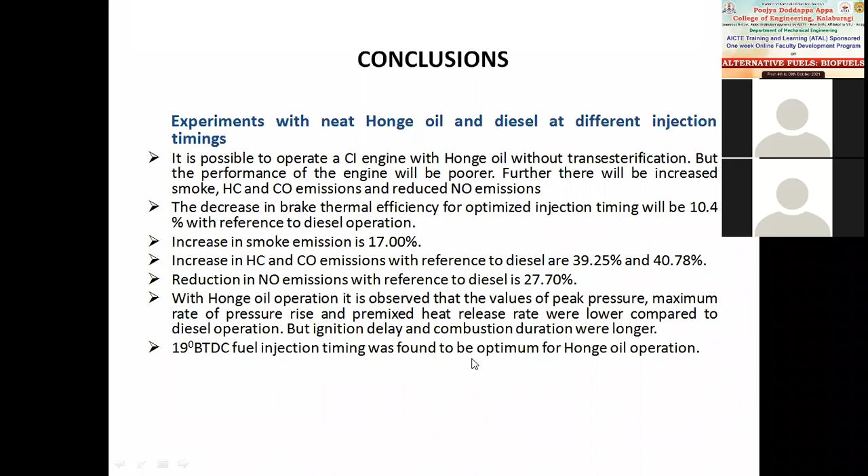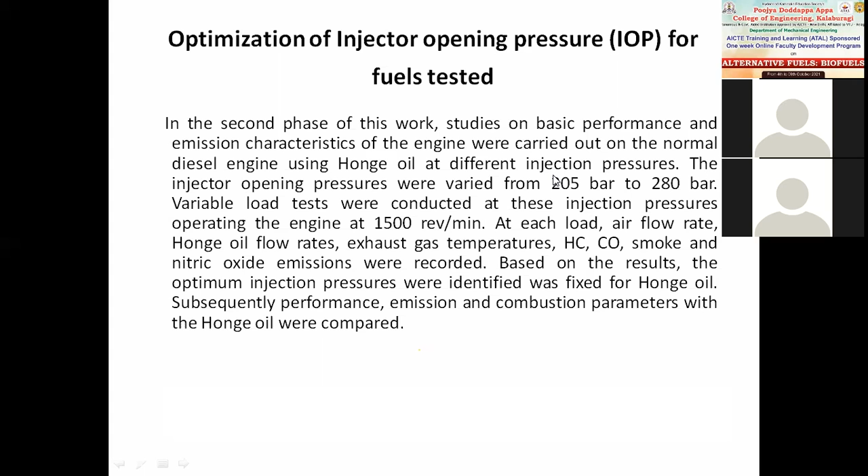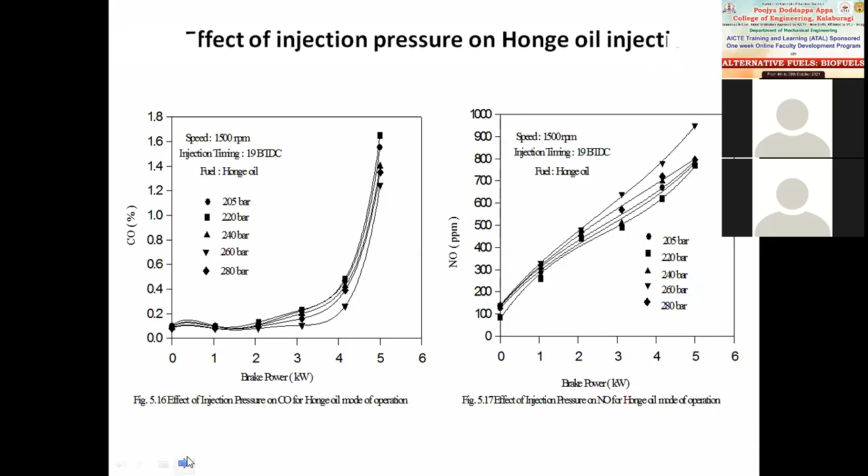The performance, emission and combustion characteristics of the engine under variable load conditions have been compared at the optimum injection timing for Honge oil methyl ester and diesel. So now, as you can observe, the comparison goes this way for the three different values. 23 BTDC is what we adopt for standard diesel, 19 BTDC for Honge oil, and 19 BTDC is used for the biodiesel of Honge oil, and the comparison is with respect to brake thermal efficiency for

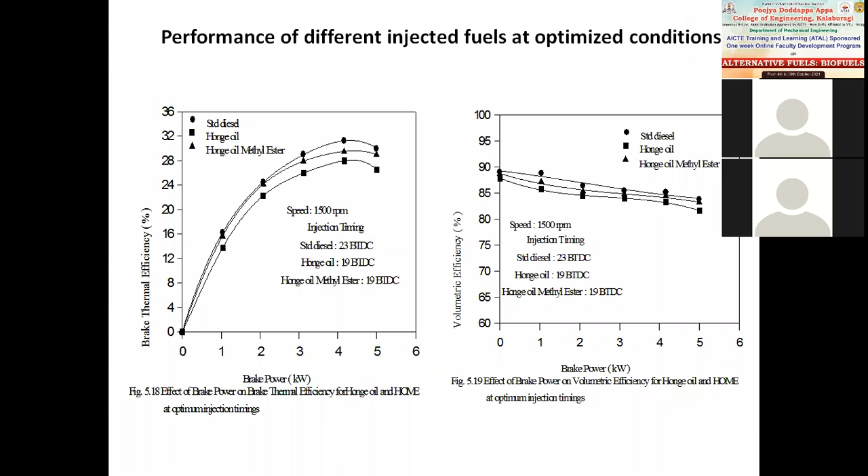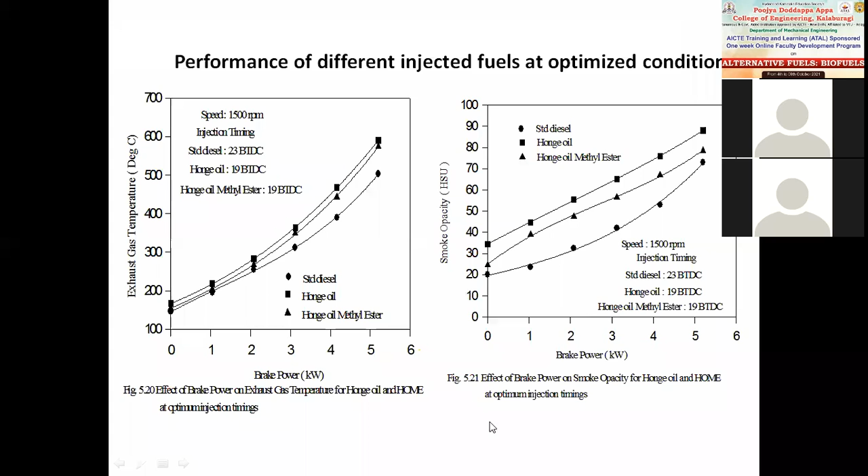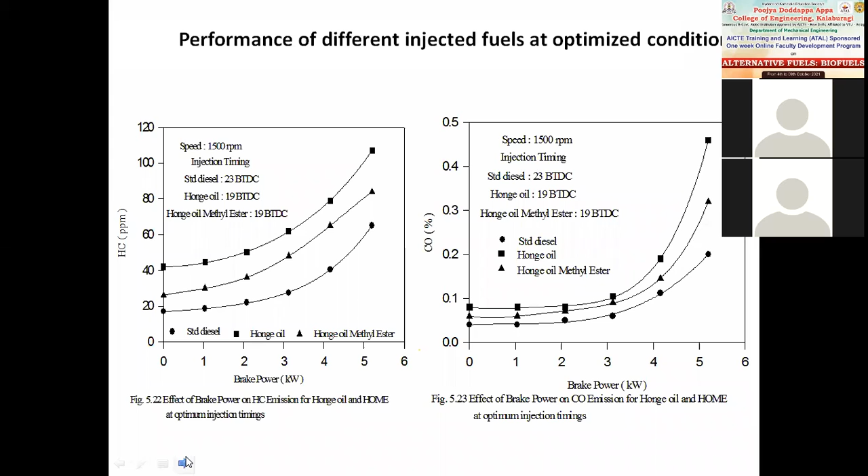Exhaust gas temperature again happens to be lowest for the standard diesel condition, whereas the methyl ester of the Honge oil shows intermediate performance between the raw Honge oil and the standard diesel conditions. So that's how we have various experimental results which highlight the operation of the engine with respect to emissions, NOx, and heat release rate.

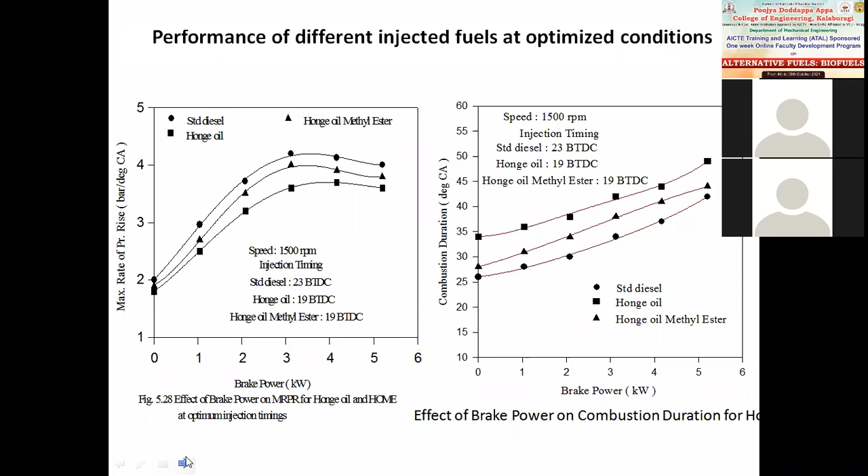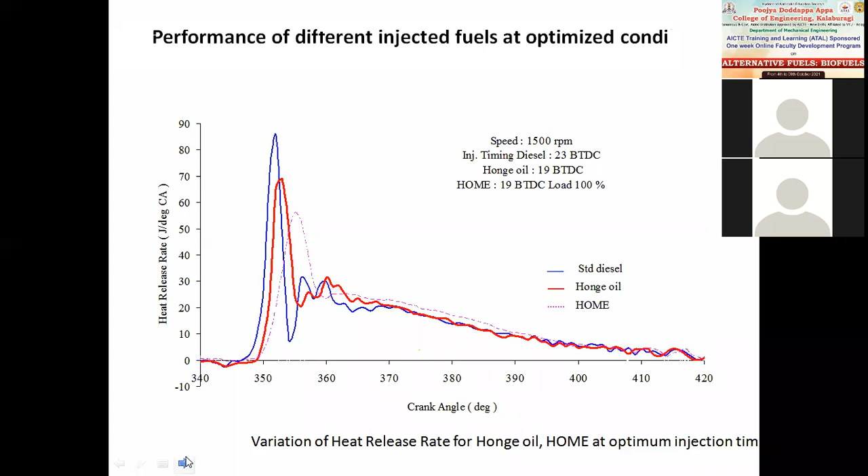Here ignition delay and cylinder peak pressure are being analyzed, and this graph indicates the effect of maximum rate of pressure rise versus the brake power for the different variations. Combustion duration, and this is the variation of heat release rate for Honge oil and methyl ester of Honge oil at optimum injection timing. Experiments on neat Honge oil at different injection timings.

So that is how I've got this presentation, where I have tried to highlight the process of how we produce the biodiesel, and also how the biodiesel performs, where we compare its feasibility with respect to emission characteristics as well as performance characteristics. These are very important to check the feasibility of Honge oil or any other biodiesel as a fuel substitute for diesel. So these were the important results we obtained from

investigations. This is one small part of the work that is being highlighted, but a lot of investigations have been done on biodiesels as a means of substituting the fuels, and all these investigations are necessary to ensure the feasibility of biodiesel used as a fuel. This is my part of the presentation.

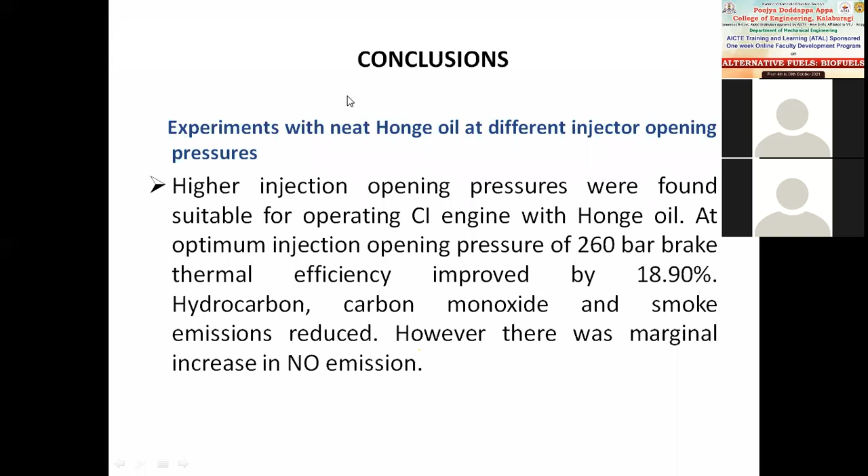These were a few things I could observe in the chat box. So now the floor is open for discussion. You may please have your questions. Yes, please. Participant, ask the question. Any query? Unmute.

Hello, sir. This is Vikas, chemical engineer. My question is about the quantity of water we use for washing and drying the biodiesel prepared after transesterification. Is that water harmful, or can it be reutilized or recycled? Normally for our lab application, to avoid contamination, we used distilled water. I think that can be a good area to research, but the contaminants induced, I believe, can be separated through a simple process of distillation.

So reuse of the water that we use for washing will not be involving tedious chemistry. I think it should be a straightforward process. But I'm not very much aware about the chemistry of handling the water that comes out after the washing process. I think we just put it to the drain without making detailed chemical studies on that. So please excuse me on this aspect. But there are no major chemical constituents that enter except for a small part of the catalyst, which gets separated, and somehow glycerol also gets separated in the process. Yeah, that is how I would put it.